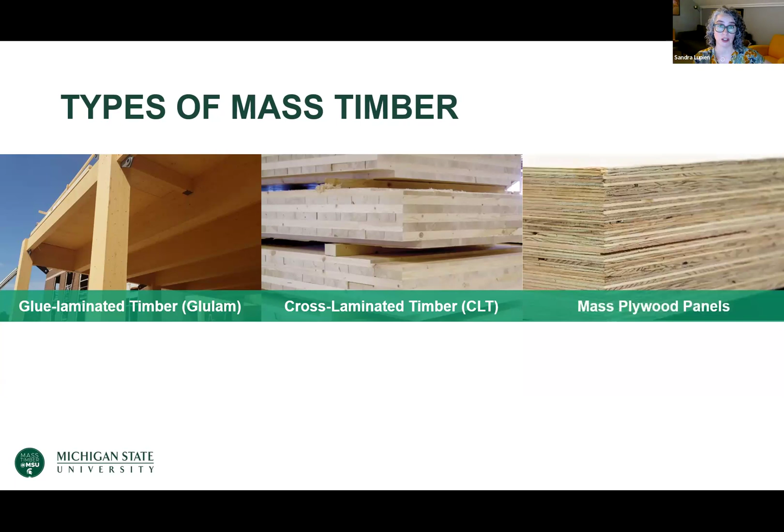Cross-laminated timber, these are gigantic panels, and similar to glulam, it's layers of dimensional lumber with adhesive, etc. But here, each layer is in the opposite direction of the one next to it, so you have a panel that's strong in more than one direction. This type of panel can really help provide the lateral resistance in a building, the property that makes the building not fall down in the wind. And this is the thing that we haven't been able to do with wood in big buildings before. These panels are typically used in collaboration with glue laminated timber, other types of mass timber, and other types of construction materials as well.

And then here's just a few more types of mass timber. I'm not going to go through these in depth, but just know that mass timber is an umbrella term for a bunch of different products, and glulam and cross-laminated timber are the most popular of them, and they're the types of mass timber that were used in the building that we're going to talk about today.

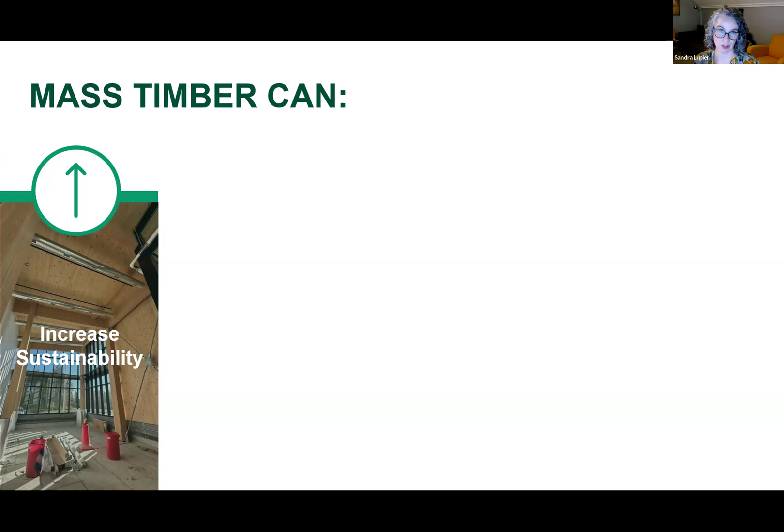Why do we care about mass timber? Why are we excited about it? Well, it can enable us to build buildings more sustainably, right? Wood is a renewable resource. When we use it, we plant more trees, and those trees absorb carbon dioxide from the atmosphere. They convert it to carbon, they store it, and then wood continues to store carbon when it's made into building materials and buildings. So this is a way that we can reduce the carbon footprints of our buildings through the materials that we choose. Thinking about MiGBC, this works really well in collaboration with strategies to reduce operational carbon in buildings, so we can get even farther.

We can improve the efficiency of construction, right? And just in a nutshell, mass timber is usually like a prefabricated kit of parts.

So when it comes to your building site, and the guys who built the building are going to talk about this, you can achieve efficiencies when you're building the building. Plus, you also don't typically need to put as many fire protective coatings or fire protection materials on top of your mass timber. And it's so pretty, you don't want to cover it with aesthetic finishes either.

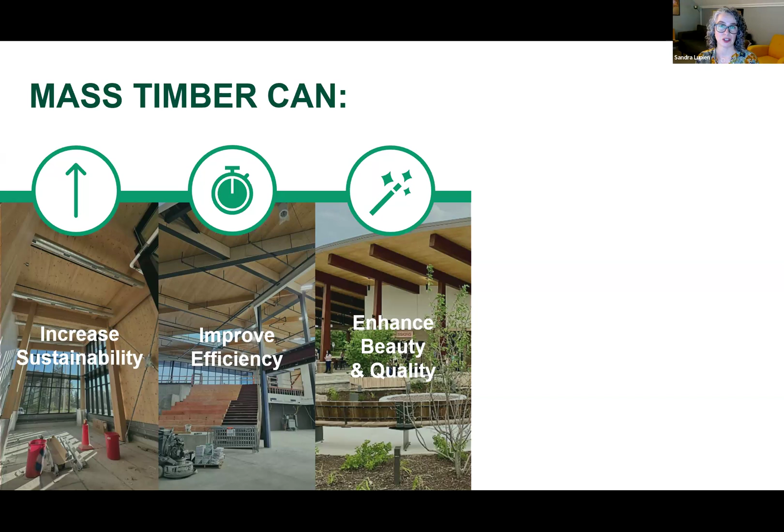We can certainly enhance the beauty and quality of buildings. There's a term called biophilia. This is the term that refers to the benefits that humans experience when they occupy buildings that include exposed natural materials, especially wood. And we see improved sense of well-being, improved mental health, and even improved productivity. So good reasons to build with wood.

We can create new types of jobs, both in manufacturing, forestry, construction. And of course, by creating a value-added, large-scale forest product, we can create new ways and new incentives to support healthy, resilient forests, both by creating revenue to reinvest in forests, and helping create reasons that forests should stay forests and not be converted to other less beneficial uses.

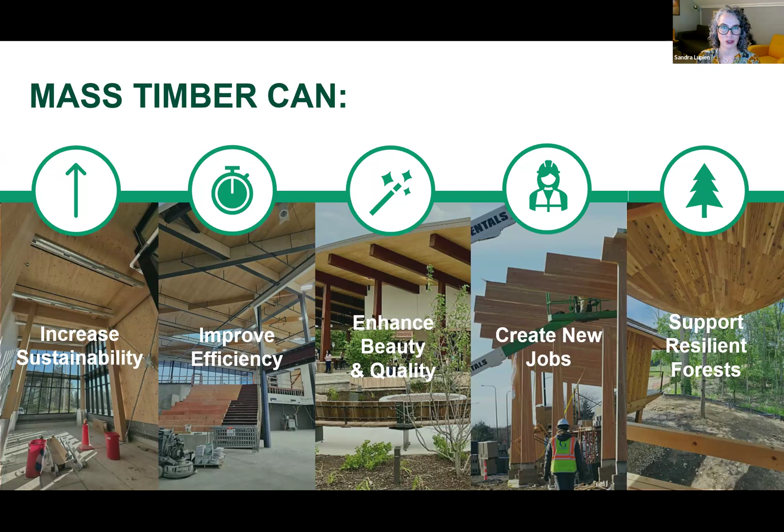Mass Timber at MSU is working to foster a mass timber ecosystem for all of these reasons. We talked a couple of webinars ago about our STEM teaching and learning facility on the MSU campus. We leverage this mass timber building as a learning laboratory for anybody who wants to learn about mass timber. So if you want to tour our building, bring a group through, learn about mass timber, you should let me know.

We operate the Michigan Mass Timber Community of Practice, which is a quarterly virtual peer learning community for Michiganders who are engaged in or interested in mass timber. We host events, we take people to events, always looking for opportunities to bring information to people and bring people to information. And then we have a robust research portfolio and are developing curriculum at a variety of different levels to advance mass timber.

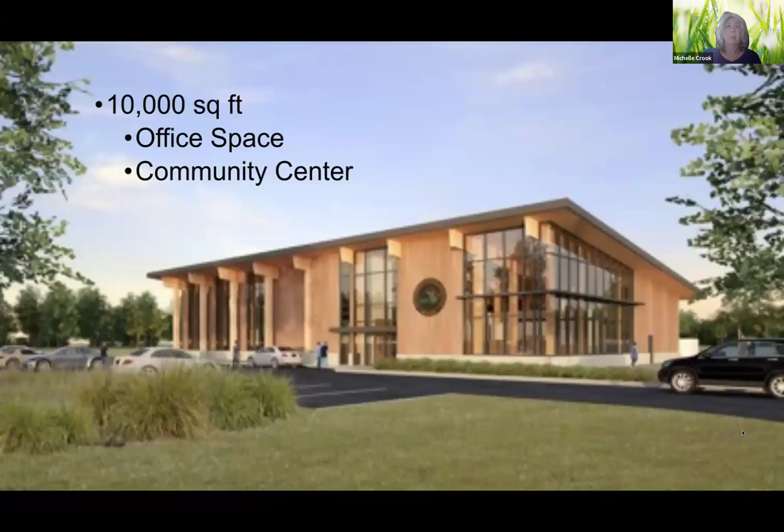So we began working on this concept when Governor Whitmer released the MI Healthy Climate Plan, which was a state strategy to achieve net zero carbon by 2050. It called for using low carbon building materials like mass timber for residential and commercial buildings. So based on this, and with our goal to support the timber industry, we pushed to make Newberry entirely from mass timber. We see mass timber production as a key economic development opportunity that benefits Michiganders in cities and suburbs and rural communities across the state.

And so we ended up with just over 10,000 square foot office space, along with a community center in the space and the lobby area, which, well, we had bigger plans initially. We did end up going to this size, but it's suited our needs well.

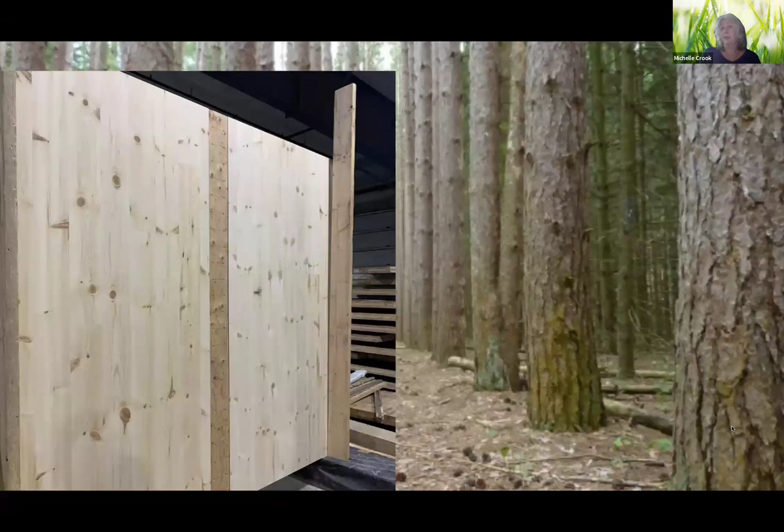Next slide, please. Being part of state government and given all of our requirements for contracting and projects, innovating and new technologies are not always easy to implement. We did not have a mass timber supplier in Michigan, which was one of the hurdles. We also started building right during COVID, when prices began to skyrocket and labor was difficult to find, and we were in the Upper Peninsula, which was another hurdle.

And then we decided to take on the added effort of utilizing Michigan lumber for some of the mass timber components. We felt this was really important. We wanted to be one of the first buildings to use Michigan sourced material and to be able to demonstrate what was possible with Michigan wood, hopefully opening the doors for mass timber manufacture in Michigan.

So we selected red pine to do this. Why did we select red pine? There's a variety of reasons, but based on some discussions with MSU, we knew we needed to focus on softwoods for the project, and red pine emerged as the best candidate. It's our fourth most common tree species in Michigan. We have a lot of planted stands of red pine as well as native stands. It recovers naturally after forest fires and is one of our fastest growing trees. And Anna will get into more about why it was a good choice based on the technical aspects of that.

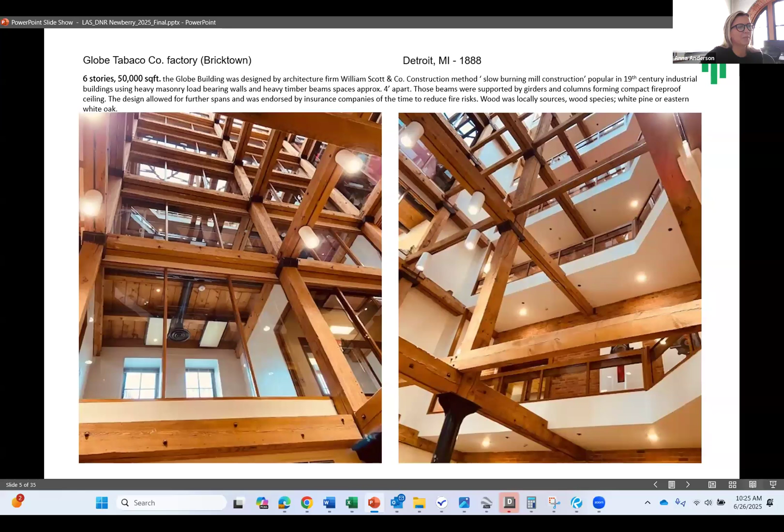Going back to it, we are a very sustainable firm. I just want to mention this: we have over 110 LEED certified buildings, and I think 7 Living Building Challenge buildings right now in planning and design. This is actually the location of our current office. We're located in a Globe building downtown Detroit. This 6-story building used to be a tobacco factory built in 1888.

And I did a little bit of research in regards to where the wood came from and what the species were. There was the typical slow-burning mill construction when they built industrial buildings in the 19th century. What I found is that possibly at the time they were using white pine or eastern white oak for that type of construction.

So the project is located in Newberry, Michelle was mentioning here, but we're in Detroit, so we travel there every month, 365 miles north, 5.5 hours driving time. I was really happy to go there.

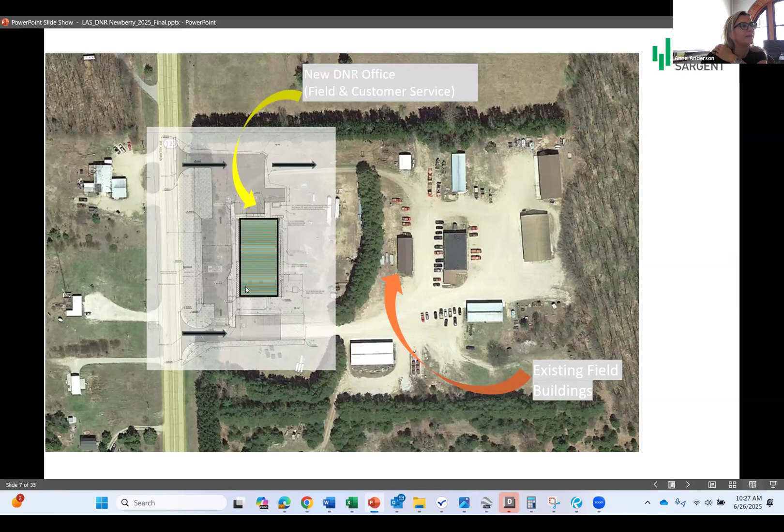The DNR had the need to locate a building really visible from the M-123, a state highway—that building is on the way to Tahquamenon Falls. So it's very visible from the road when you're driving by. Even Jason was mentioning a few times that sometimes people were driving by and then turning back because they wanted to look at what the building was. The purpose was placing it at the site with that particular exposure that would engage people to stop by and engage their curiosity.

Some of the things Michelle already mentioned, I'm not going to be redundant here. Maybe I'll more talk about the whole space.

When you look at this image, there are mostly office buildings, divided into multi-purpose room, lobby, and display area where the DNR will showcase the natural regional resources.

And I think we're also going to showcase the story of the building, the mass timber, where it came from, as well as all the work Michigan Tech is doing in regards to investigating hardwood for CLT production.

As you can see in this isometric view of the building construction, we used 5-ply CLT for roof decking, which you can see here in a cut, and 3-ply exterior walls of red pine for the building perimeter.

The whole structure is a post and beam structure with glulam Douglas fir. Initially, when our structural engineer worked on the project, I think the roof was a 3-ply roof decking, but because of the design values and performance values of red pine, we needed a little bit more material, so this became 5-ply.

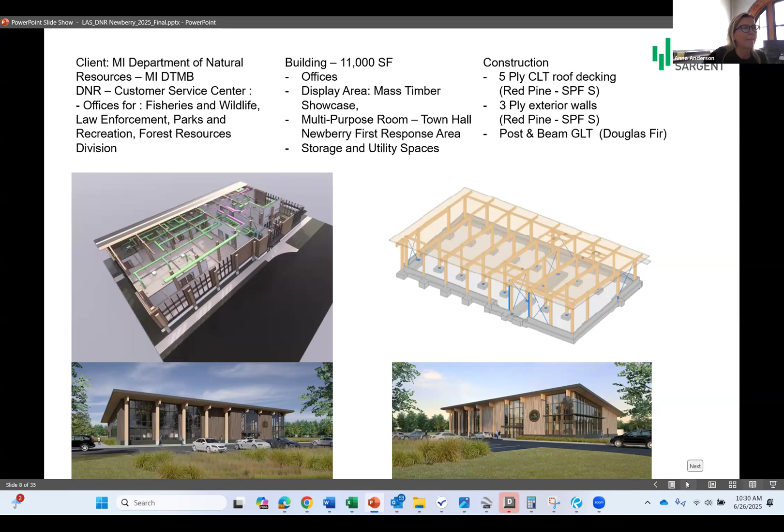This is a bit of the process, and Michelle was mentioning this before - I'm not going to talk long about this, but the project is supposed to be bigger. There's supposed to be a big storage building behind, for the DNR to use for equipment.

The building altogether is supposed to be 30,000 square feet. It just didn't economically pay out at the time - we were going through the pandemic and some other issues as well.

So I just wanted to show here that we did some massing studies, and we played with different structures and different roof shapes.

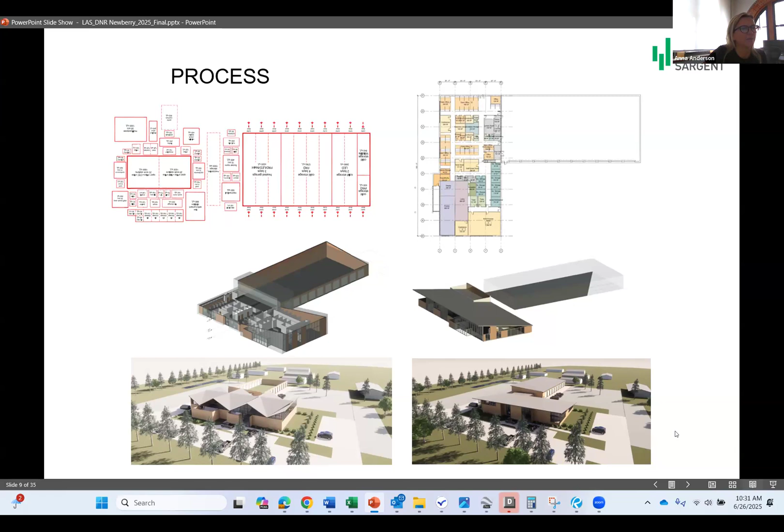This was part of the customer service center connected with the locker rooms and the storage building, approximately 15,000 square feet. The other one was also 15,000, ended up being around 10,600 square feet.

These are also the earlier studies of the little shrunken building showing field offices, customer service offices, wildlife and fishery center, multi-purpose room, and the lobby and display area.

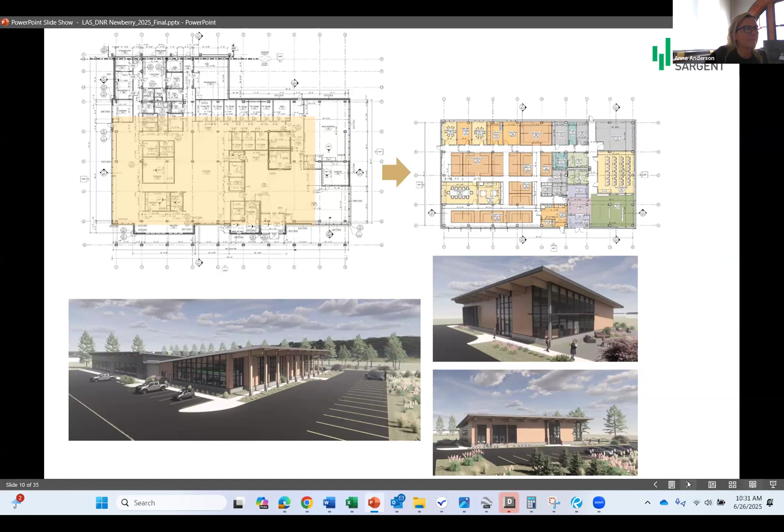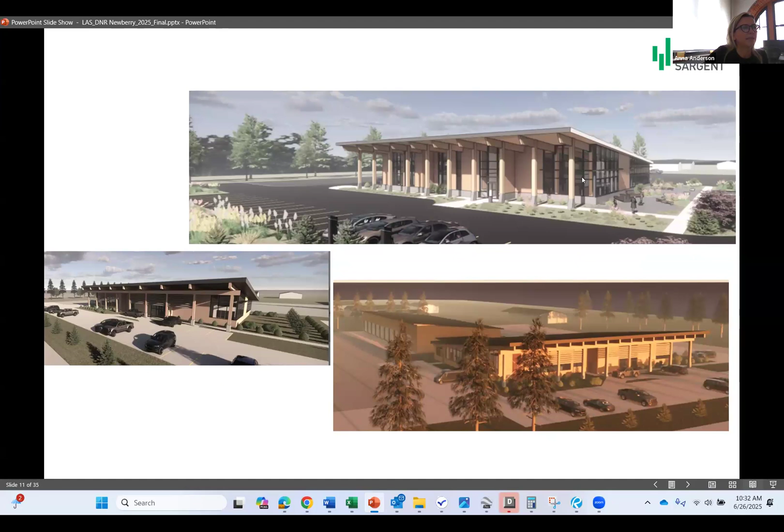A little bit more of the early renderings, just playing with the structure. The main intent was actually this southwest corner here, and we'll see this in further images too - the invitation to enter the building and to see the structure throughout the glazing.

Michelle mentioned this also - this is a project showcasing one of Michigan's top industry forestry and timber products, and this is the story of how we got there. We had to find the trees in Michigan, find a sawmill, and find a manufacturer.

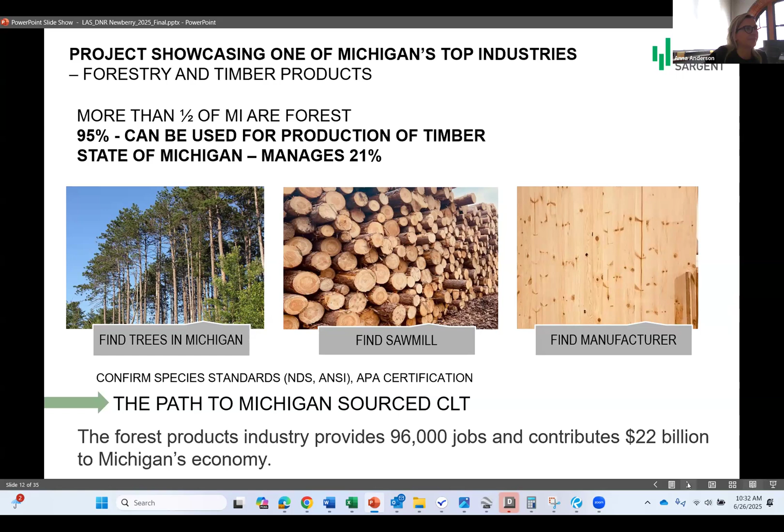Michigan State University's Forestry Department, School of Planning, Design, and Construction has done extensive study on Michigan's tree species and the viability of using the species in construction. That was the reason, based on the study, they worked with our design team to select red pine for the project.

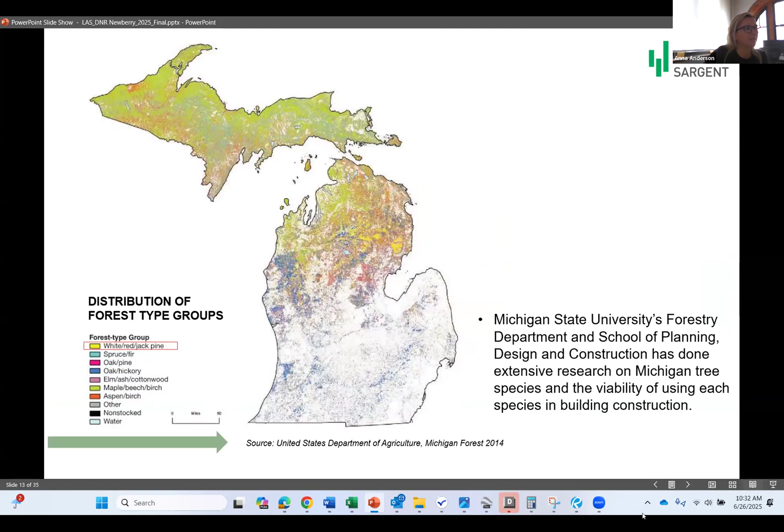As you can see here, half of the state is forested, and Michigan has diverse forest types. I think, Michelle, you mentioned a little bit different numbers here, but I think they were close.

But red pine is 5% of the mixed species types. Red pine grows in the eastern Upper Peninsula, western Upper Peninsula, and northern Lower Peninsula.

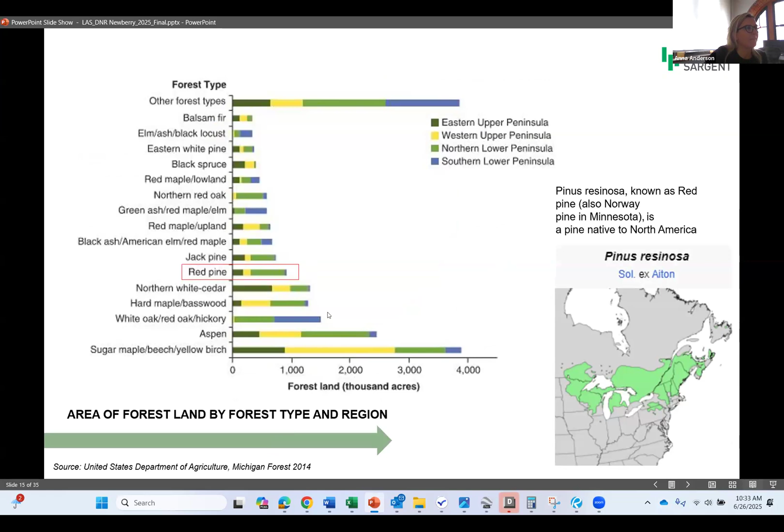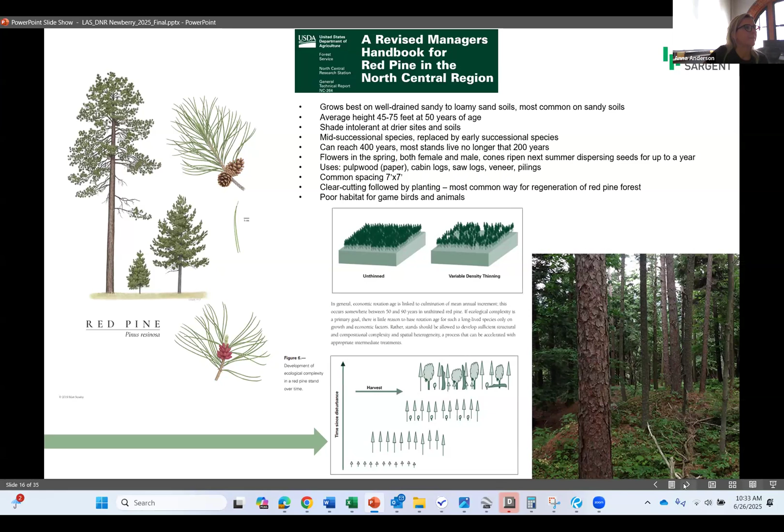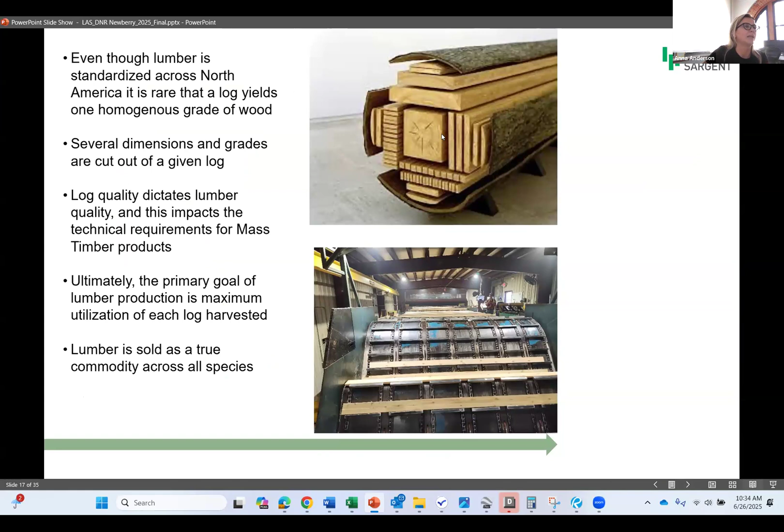This is just an image showing, as a reminder - maybe Russ will touch on this later too - how the log quality actually impacts the efficiency of mass timber.

So, National Design Specification from American Wood Council. This is the process of certification, and I think Russ Vaagen will touch on this as well a little bit more.

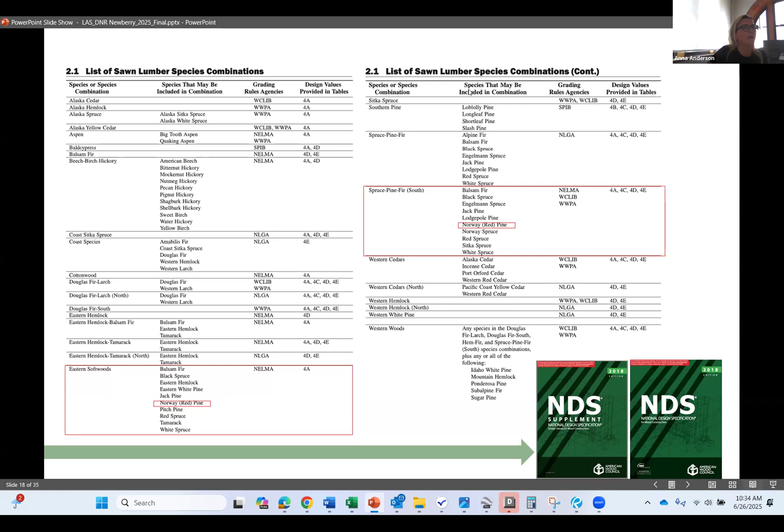Red pine belongs to lumber species in eastern softwoods, and is located in the spruce pine fir combination of sawn lumber species. Then we have to look at the design reference values for visually graded dimensional lumber for spruce pine fir south.

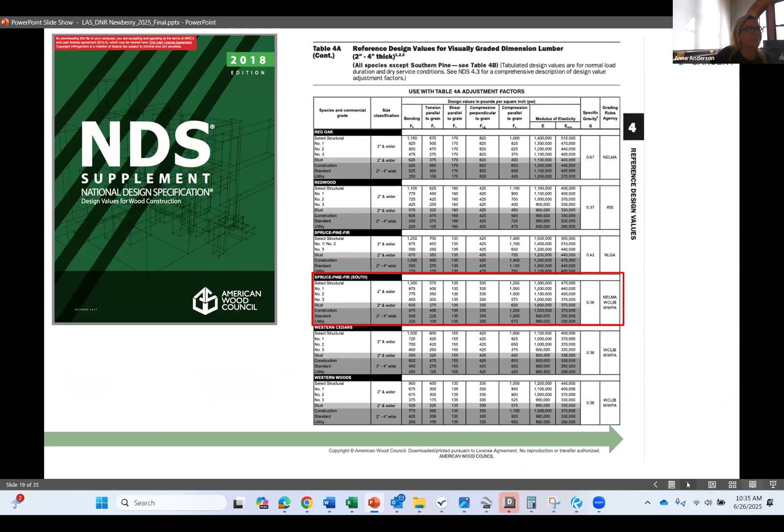And then for mass timber, we look into mass timber manufacturing standards, and so it relates to APA PRG 320, the standard for performance-rated cross-laminated timbers.

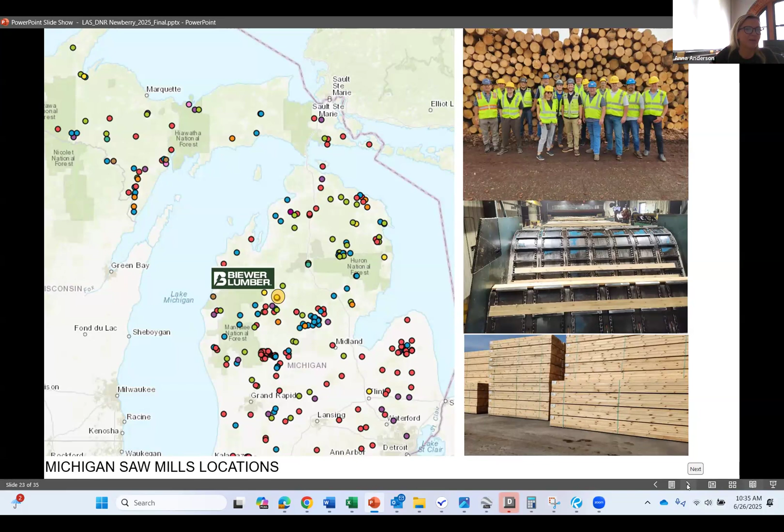So this is the path of achieving the locally sourced timber. Part of the team visited Biewer Lumber. I think it was 260,000 board feet that were transported from Biewer Lumber to Colville, Washington, where the supplier was selected, manufacturer Vaagen Timbers.

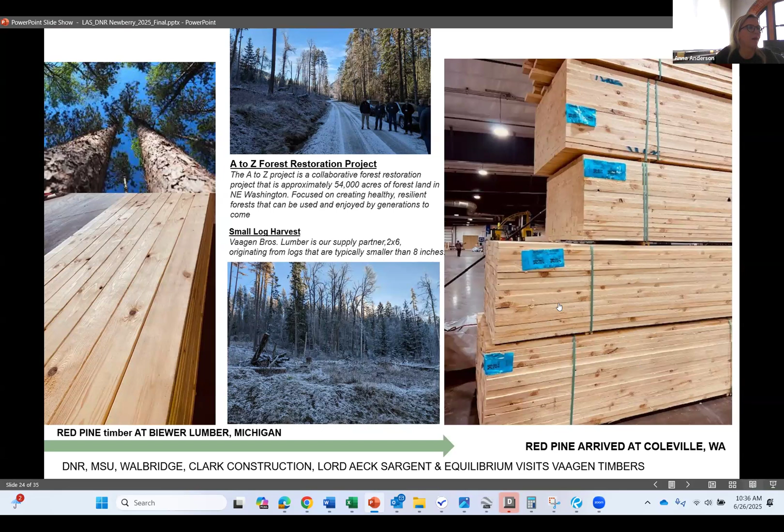We visited Russ's forest and had a beautiful tour there, and also visited the factory. We were part of the design team with Michigan State University, and the contractor was part of experiencing the whole certification process at the facility.

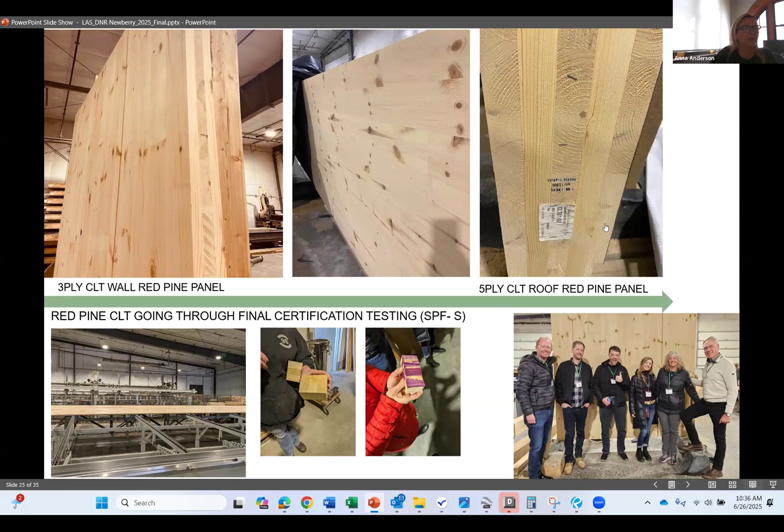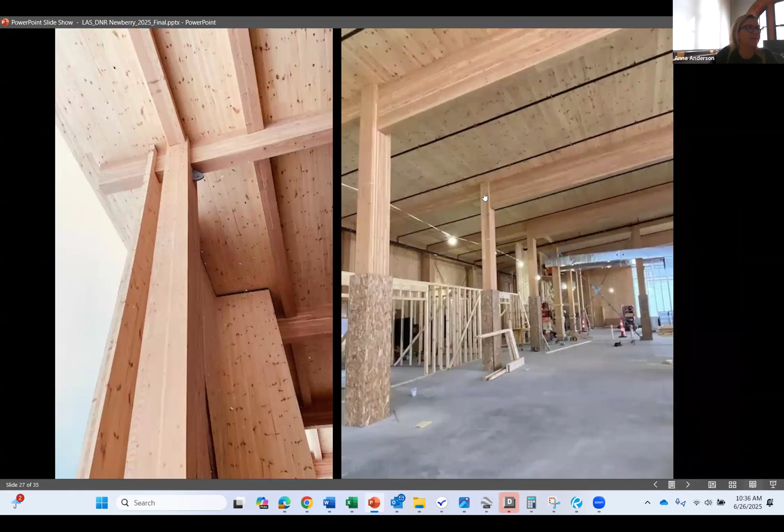Some images from the construction. You can notice the significant difference in the red pine, showing the knots in the wood, which contrasts with the dark fir of the beams and columns.

I think this image is from January this year. An interior image showcasing the display area.

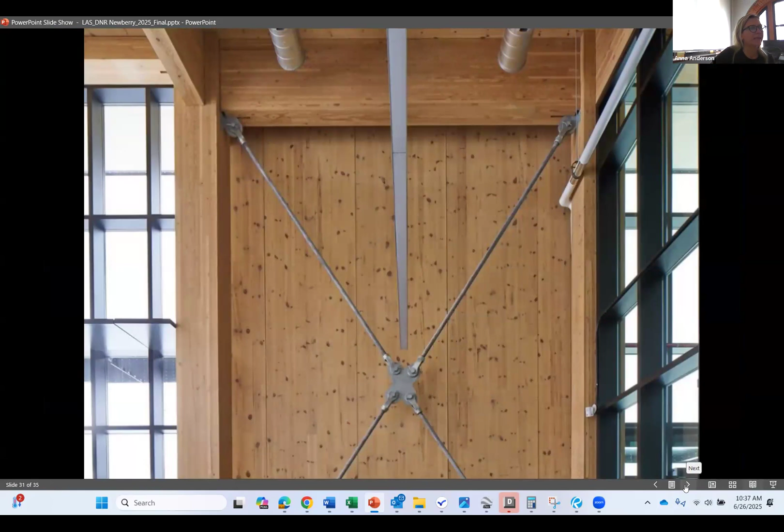This is the multi-purpose room. You can see the connection, indoor and outdoor, with the beautiful trees beyond. And this is again the detail in the lobby and display area.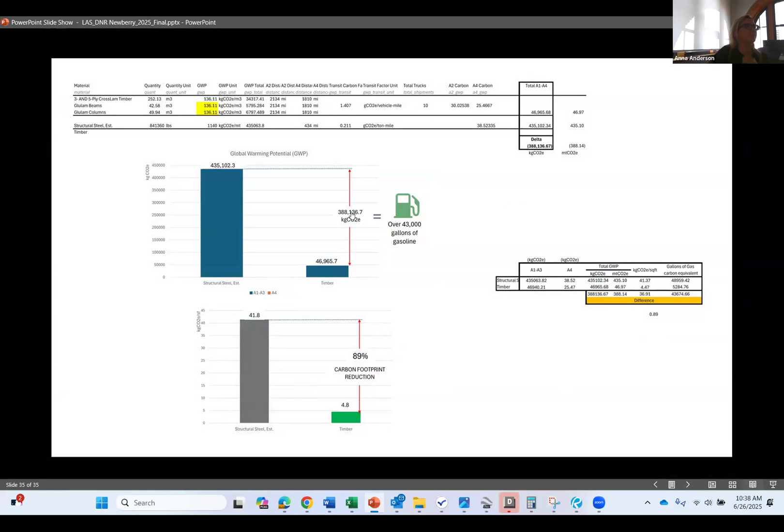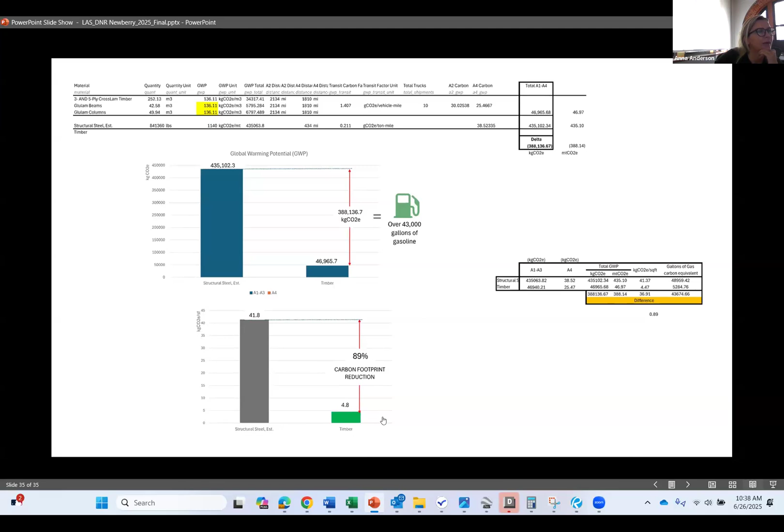And our team did a study regarding carbon footprint. This study showed an 89% reduction of the carbon footprint comparing the use of structural steel versus timber as used in our project. I think that's all I had.

Wonderful, thank you, Anna. It is indeed a beautiful building, and something to be very proud of from a design perspective. Russ, as you're getting your slides up, I'll share a couple of things. I just think this building is so striking, because as Michelle mentioned earlier, Newberry is a pretty small community, but this beautiful building just grows right out of the landscape and makes an impression, like tall trees that are part of a forest. I think that's the impression it gives. I'm sure that was intentional.

As you're coming across it, is it M43? Is that what it is? Yeah, 120—I'm sorry? I think it's 123, right? M43 is not that. I'm wrong, yes, that's down here. But yes, it's so incredible in the landscape there. Hopefully when people are going through or in Newberry, they can swing by and take a look at it. It is gorgeous.

So now we're going to hear from Russ Vaagen with Vaagen Timbers, which is the supplier of the cross-laminated timber panels and the glulam on this project. Russ is going to talk us through how a certification process like this looks on the part of the manufacturer and the collaborators. Thanks for being here.

Thanks for having me, it's always great to be part of a project like this. So Vaagen Timbers, as Anna and Sandra talked about, we are in Northeast Washington State. A lot of people confuse us with Seattle, but it's probably like the UP and Detroit—a large state and very different.

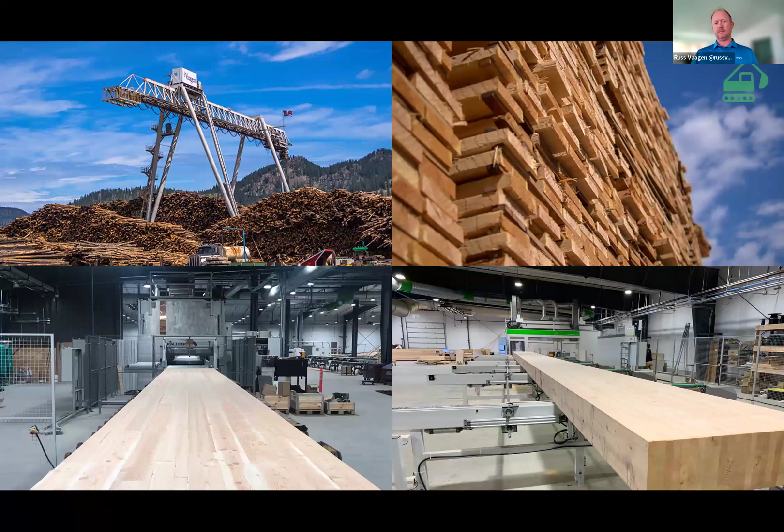I'll just share some slides here about who we are and how we got here.

This one I like because it shows the life cycle after the wood leaves the forest. You've got the portal crane lifting a truckload of logs at the Vaagen Brothers Mill in Colville, right next to our CLT plant. My family has been in the forest products industry for four generations.

We've been doing this for a long time, trying to perfect how to get the most from our forests. As you can see, the logs are very small.

Anna referenced the efficiency, and the technology has really moved from large logs and old growth to small logs and thinning.

We take a log, typically the size of a steering wheel in a car, and cut boards out of that in a stack very effectively and efficiently. That's how most of the forest industry operates throughout North America now.

The small logs then go into rough lumber, and at the bottom you see our CLT panel on the left and the glulam beam on the right. We have a very unique press in Colville that allows us to do both through the same press.

It does have its limitations in terms of size, so we overcame that challenge in this project by connecting two 4-foot panels and delivering them as an 8-foot panel into the Newberry building. It turned out great, and it was awesome.

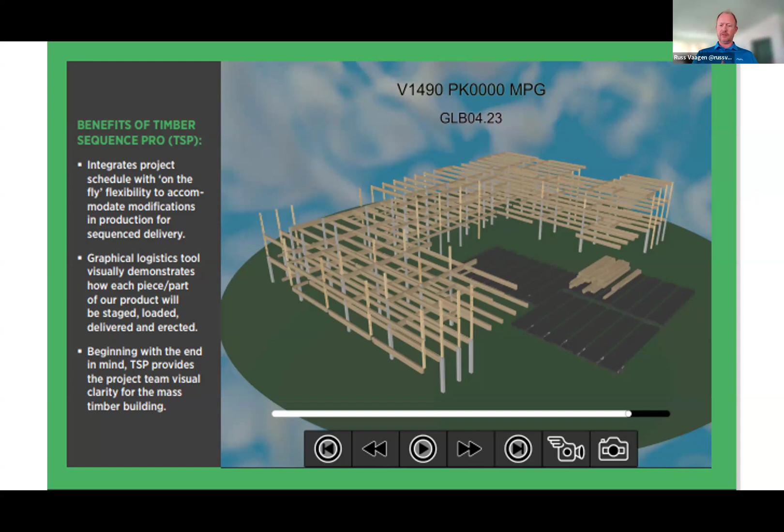We even add some additional features to the product, like custom hardware installation in the factory. So it's not as simple as Legos, but these are like large wooden Legos. They go together in a sequence. You follow the instructions provided, you collaborate with us, you know what's happening, and the building goes together very smoothly.

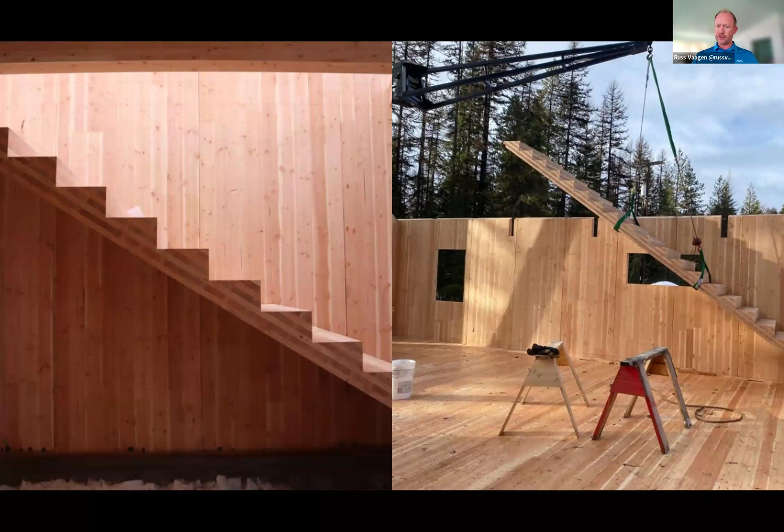I want to show a few images of projects we've done, so you can see there's a broader scope here than just one particular building type.

This is a home we did about 30 minutes from our factory. It's a lake place, near the Little Pend Oreille Lakes, just outside of Colville. Besides being a little more mountainous, it's very much like Michigan lake country, with lots of little lakes and some larger ones. This one sits on the bank of one of our lakes, and you can see we took a 7-ply CLT panel and cut a set of stairs, which became the design focal point for this house.

A lot of people think of timber as being kind of old, tired and dark. But as you can see here, the homeowners—this is the same project, the stairway comes up just to your right there—we used a whitewash finish on the glulam and CLT in this house.

This house was really cool because we delivered it in January. We started on a Monday, and the homeowner was sitting on her deck by Saturday. It snowed twice during the week at this location. From Christmas into May, there's usually about 3 to 4 feet of snow sitting at this elevation in the winter, so it wasn't an easy construction time.

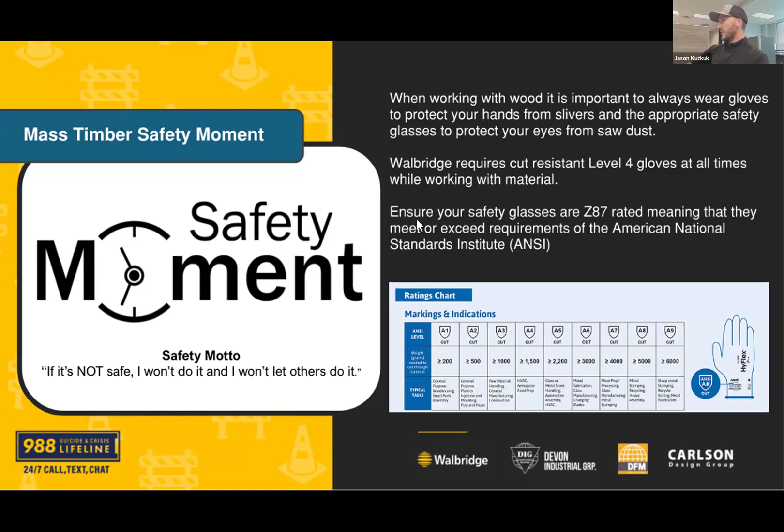And for those that don't know, safety gloves do have a little shield icon on them with a rating for their cut resistance level. So A1 being the lowest and A9 being the highest. So it's important to make sure that the gloves you're wearing are rated for the work that you're doing and the materials that you're handling.

So I've got some highlights here that some of the others have already touched on as far as our milestones during the pre-construction phase of this project. The first one being that the DNR engaged Walbridge early on while the project was still in the design phase, which was critical for us to provide feedback on constructability and details and sequencing of the actual construction of the

building. Our next milestone was identifying a sawmill that we could work with to provide the Michigan feedstock to our mass timber manufacturer. And we visited several sawmills throughout the state, and we ended up working with Buer Lumber in McBain, Michigan. They're a great sawmill to work with.

The next key step was engaging our mass timber fabricator, which we were partnered with Vaagen. They were a great partner for us throughout the process, very willing to step in and go through that certification process that Russ was talking about, which was the next key step there. That took some time. They actually did that certification process in conjunction with doing shop drawings for the project. And the timing actually worked out perfectly there, luckily for us. And our last key step was engaging our mass timber erector, that being Clark Contracting Services.

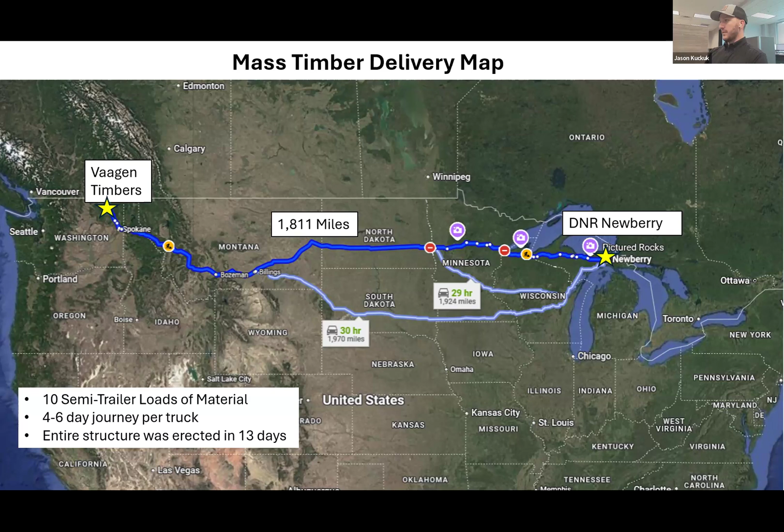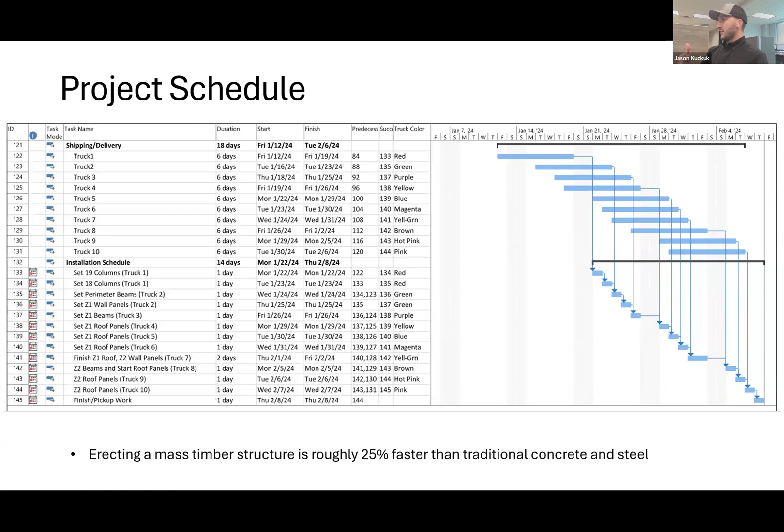So it was about a 4 to 6 day journey for each truck. So looking at our schedule here, it was a 13-day total erection timeline, 10 trucks. So if we look here, you can see when our first truck arrived to the job site, there was already 3 or 4 trucks on the road behind that truck. So it was very critical for us to hit those production timelines and get that material picked and into the air.

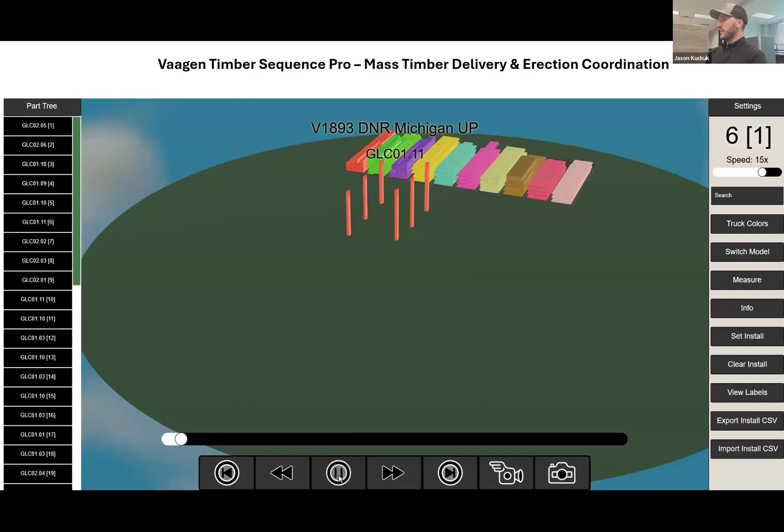Here's a little video here of a tool that Vaagen provided us to coordinate the mass timber delivery and installation sequencing. So play this really quick for you guys. So you can see it's color coded by truck here. The first truck is red, had the majority of the columns on it, followed by the beams and wall panels. We had the crane positioned on the back side of the building there, so we actually worked and set the remaining beams and roof panels on the back side of the building.

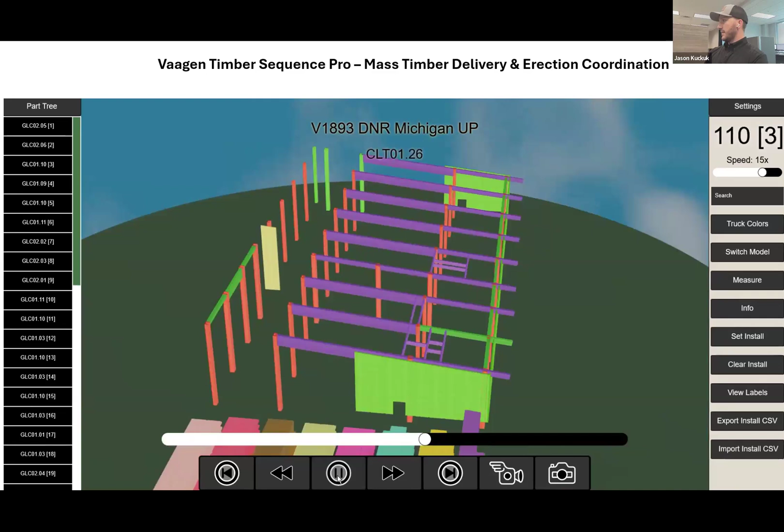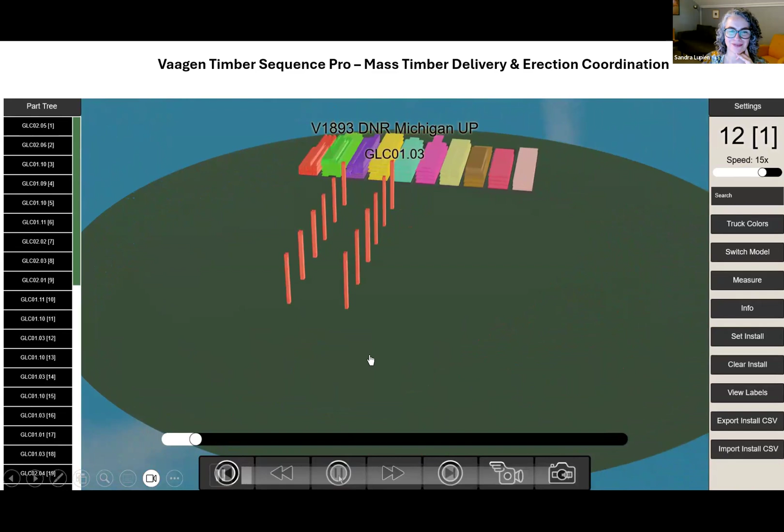And then we transitioned to the front side of the building, moved the crane to the front, set the rest of the wall panels, remaining beams, and CLT panels. And it wasn't quite as fast as this, but it felt like it. Almost. But this was a great tool. It really helped not only the construction team visualize and coordinate the installation, but the DNR, the owner's representatives, the design team could all give their feedback and input on our sequencing.

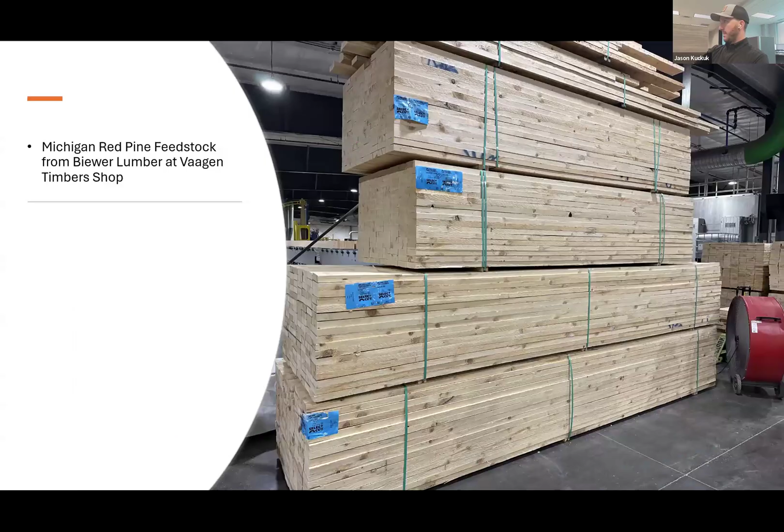And Nate, you want to talk about some of the details that we had specifically on the project? Sure. Getting into our installation a little bit, the columns and base plates we had to be extremely precise. The anchor bolts and base plate layout had to be laser verified, as the glulams were fabricated with extremely tight tolerances. And with the columns being 26 foot tall, any variation or deviances from plumb were magnified. We used dowel pins at the bottom base plate to secure the connection and patched those with wood plugs to create a clean connection with minimal hardware visibility.

Yeah, you can actually see the bottom of the column is routed out, so that covers that steel base plate there. And then the concrete floor slab gets poured around that. So really, you don't see any of the steel structure under there. And that was one of Anna's details, she wanted the columns to look like they were floating. So.

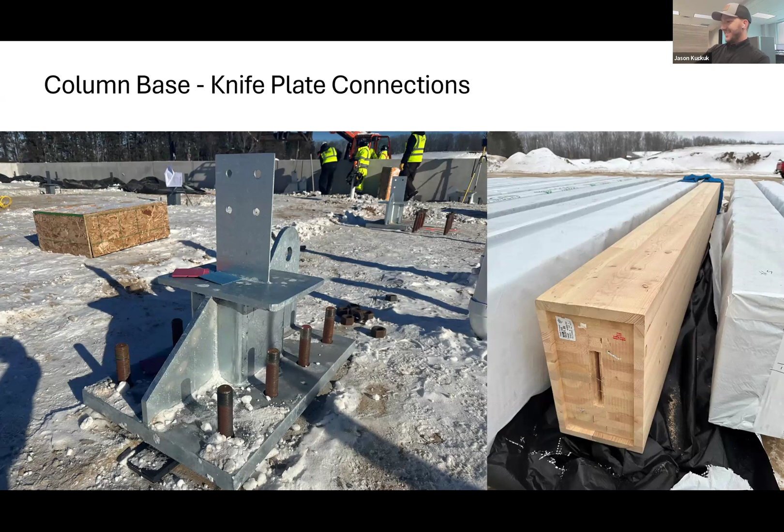Yeah, and actually at the top of the columns, the column to beam connections, concealed hardware was also utilized to again create that clean aesthetic per Anna's design. Some beam members also sat in factory cut pockets within the top of the columns, giving us a flush beam to column connection, which again required those tight tolerances and careful alignment.

Yeah, and I think it's important to note too that this hardware was installed by Vaagen in their shop, so when it arrived to the site, it already had that hardware connected on it, and that reduces the time in the field to attach that hardware.

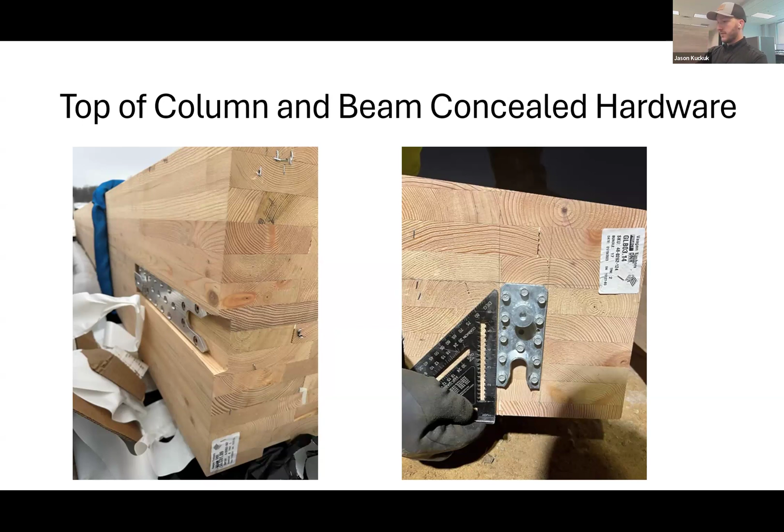And taking a look at one of our columns being set here, you can see our rigging and crew composite. We choked the column using a nylon strap with one of our carpenters up in the basket, guiding the column into place, with 2 carpenters below, aligning the column to the knife plate and securing the dowel pins. Our crane operator and riggers were in constant communication with sequencing to maintain the pace and ensure all of our crew members were on the same page.

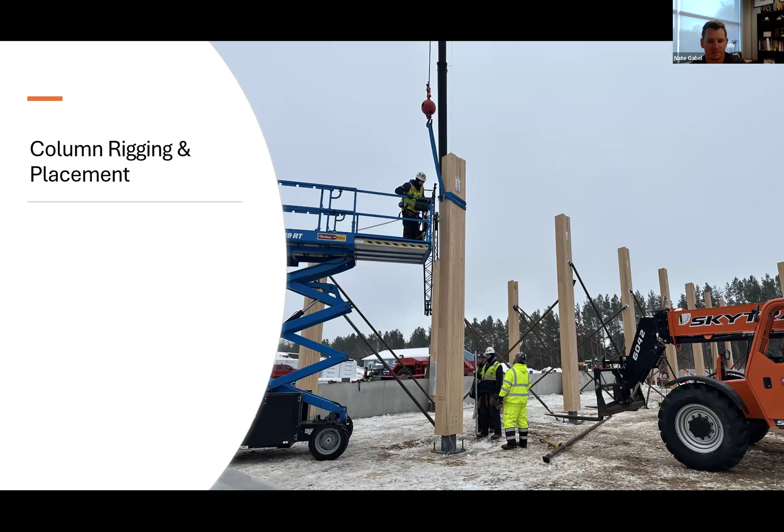This next slide shows our columns mostly set up to where the crane could safely reach from the backside of the building. One unique challenge we faced was actually the braces. As we mentioned before, these columns were 26 foot tall, and with no concrete pad in place, we had to reach the adjacent footings in the foundation. So we actually used tilt-up concrete wall panel braces to maintain plumbness. It wasn't a concern over the weight of the glulams, but it was more for the required reach to be able to make our columns plumb.

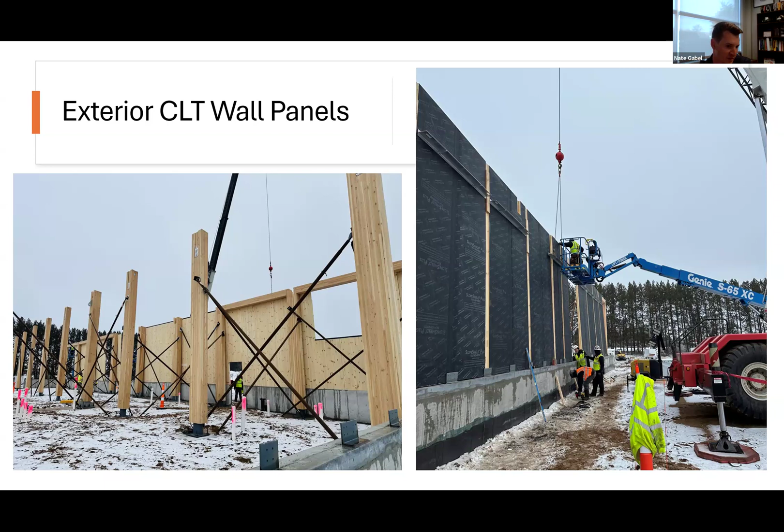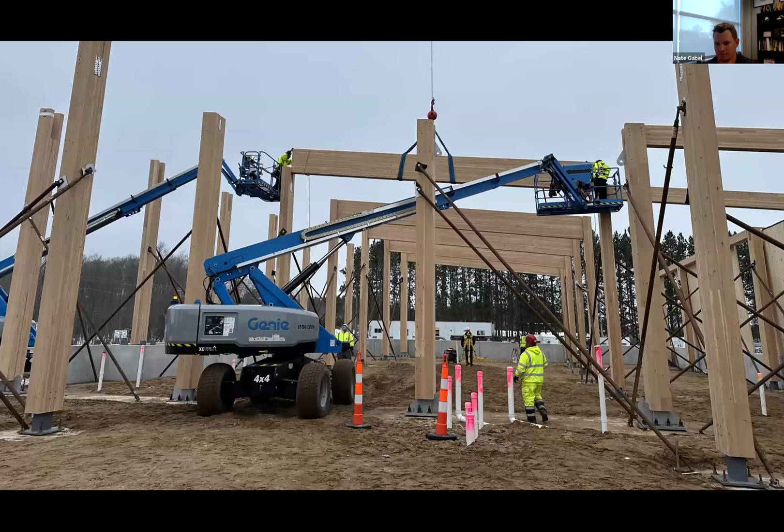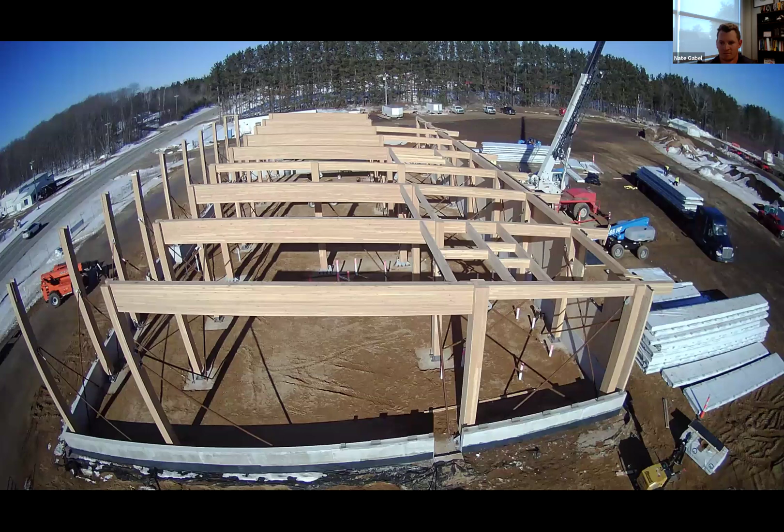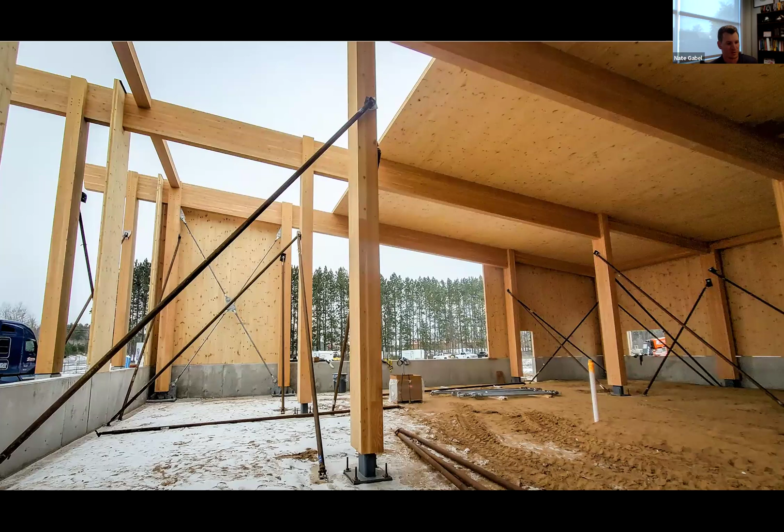These next few slides are drone and progress shots. Here you can see the truck staging and crane position on the back side of the building, reaching out into its safe distance, over on the right-hand side of the picture. Here, you now see the crane move to the front of the building where we're completing the CLT roof panels. A couple of progress photos from the inside of the building.

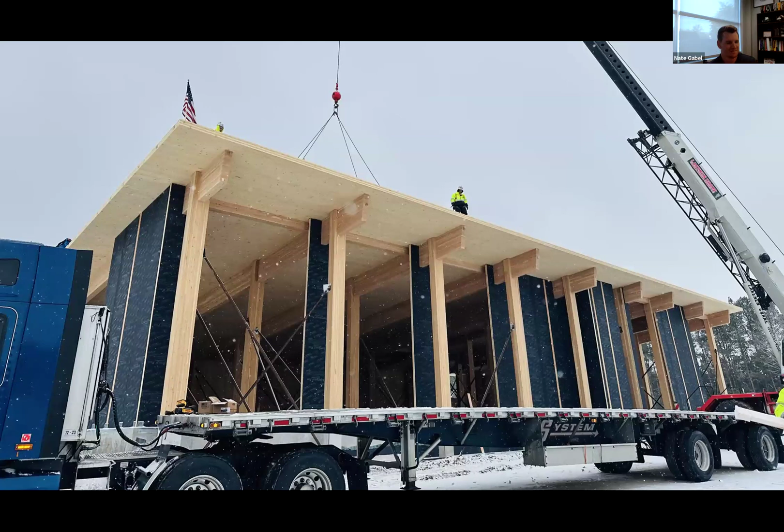Yeah, we did get lucky with the weather, the winter of '23. And here we are setting the final panel. At this point, we had the building fully dried in with temporary protection at all the openings and added fans and heaters early on to maintain the humidity and moisture. Again, QA checks were constant, especially during the early enclosure phases. So kind of like how Jason and I were talking about, we had the building up in 3 weeks and then fully enclosed in 4.

Yep. I would like to point out that we did a 3D BIM model of the mechanical system and coordinated that with Vaagen to pre-cut all of the penetrations. You can kind of see some of them here in the roof panels for pipes and ductwork that needed to go through the roof, which saves a lot of time in the field and is also a better quality product, being able to make those cuts in their shop rather than in the field.

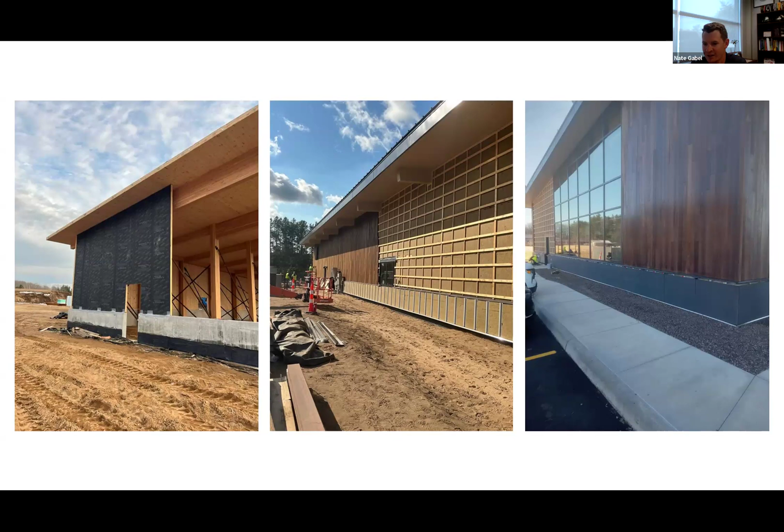In addition to the mass timber, we had the carpentry scope, including building the exterior envelope. Here we have some progress shots showing the blank CLT wall panels on the left, right off the truck. Then in the middle, you can see the rigid insulation and beginning phases of the thermally treated wood siding that Anna mentioned, and finally the glass fiber concrete panels on their support framing.

Moving on to the interior, you can see some of our 2x stud framing. Sticking with the local sourcing theme, we bought all of our framing materials from a lumber yard less than 2 miles up the road from the project site.

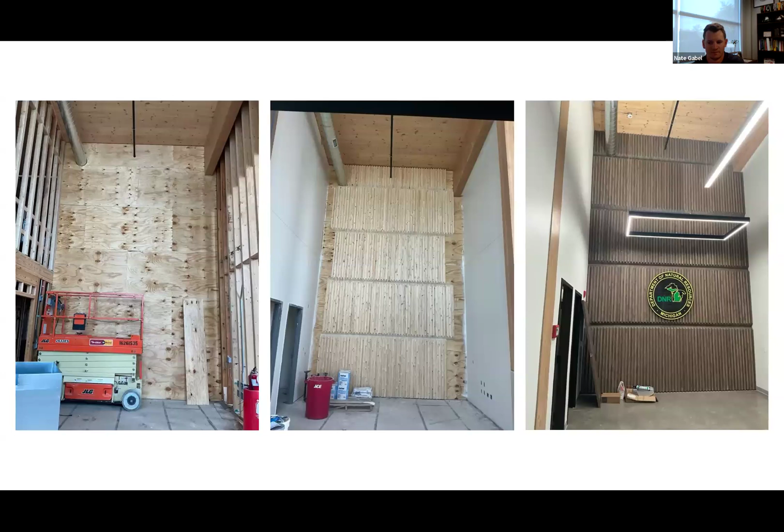Additionally, something you don't see in your projects every day related to the mass timber world was a custom site-built NLT accent wall. The nail laminated panels are not structural and are meant to be an architectural piece as you enter the DNR building right behind the reception desk.

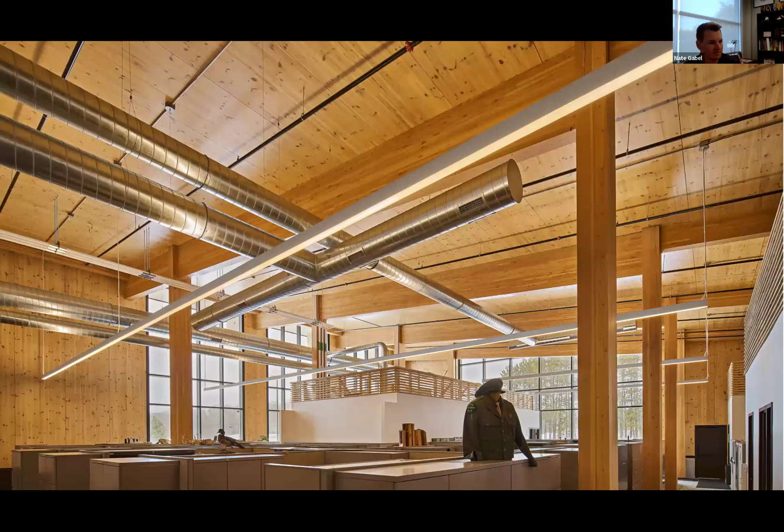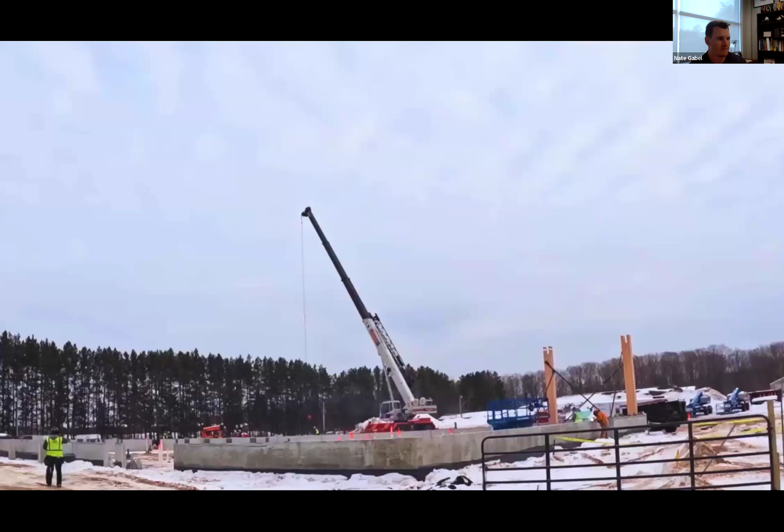And here we have a couple final shots as we wrap the project up. I actually brought a GoPro out to take some time-lapse footage of our install. Unfortunately, a couple of the videos of the CLT install got corrupted. So if anybody is a GoPro expert, feel free to reach out because all the videos are sitting in storage and we'd love to figure out how to recover them.

Yeah, I think that's all we got. Thank you.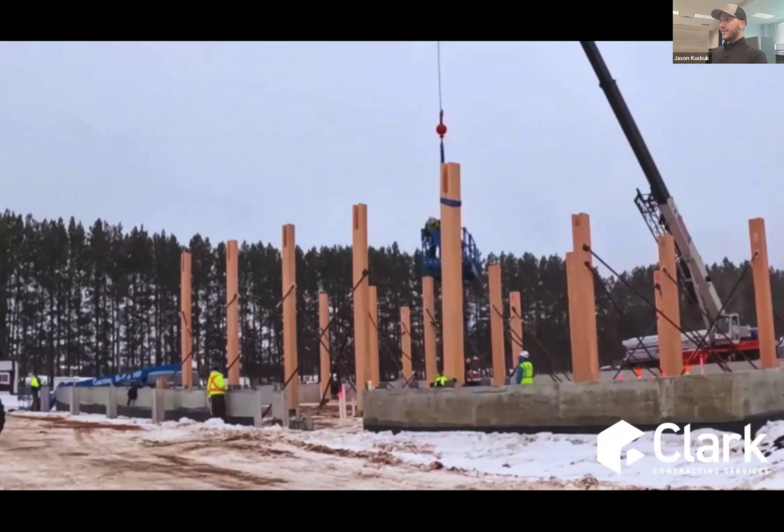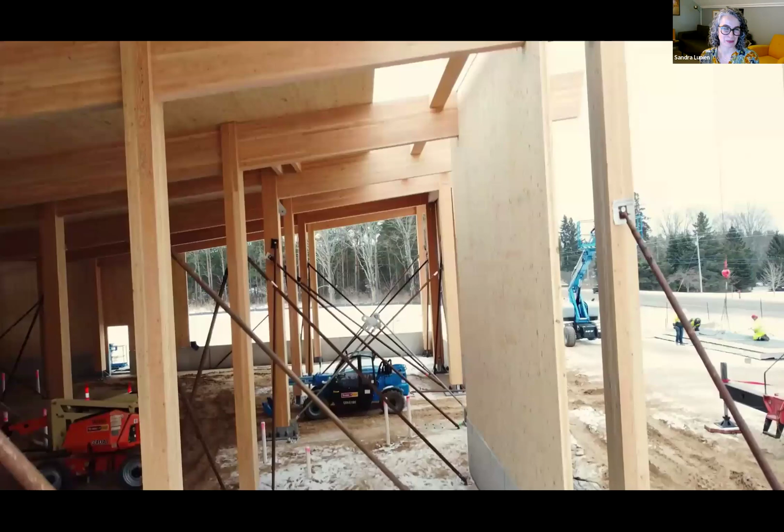Just one thing I want to say that I appreciate so much is how well your teams documented the project. It's so valuable for people to see how the building comes together. I love the way, Jason, you presented the model, the little cartoon model, and then Nate, you had photos and footage that showed those steps in real life and how the model then ended up applying in the field. Great job explaining how all these pieces came together.

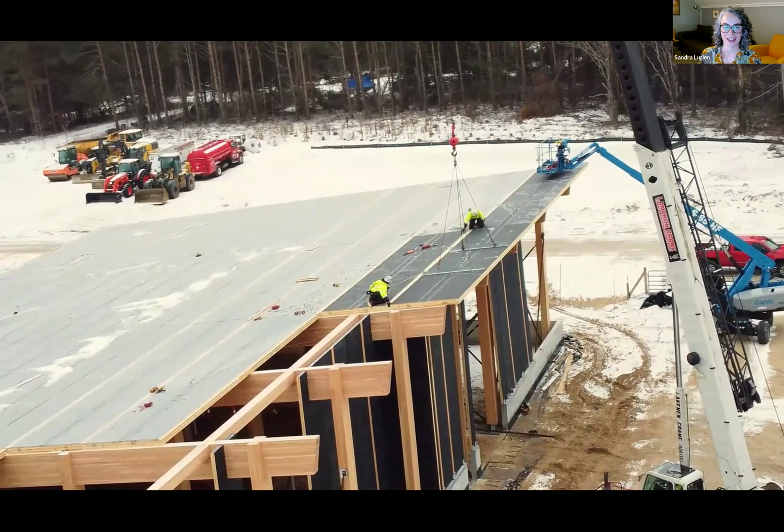Some people are putting very supportive comments to you in the chat. Do people here have questions for our wonderful panelists who've shared with us from vision all the way to completion, how this wonderful Department of Natural Resources customer services building in Newberry, Michigan came together?

Something that has been said in various ways on the call, and I'll say it in my own way: DNR taking the leadership to really insist upon Michigan wood, red pine in CLT panels in their building demonstrates DNR's leadership in this space, wanting to see mass timber production in Michigan using Michigan wood and putting Michiganders to work. I think by doing it this way, they've effectively de-risked this particular species for any prospective manufacturers in Michigan, possibly Vaughan, as Russ mentioned. So really an important act of leadership on the part of DNR.

It's hard to say, but I'm hoping that this building will last 100 years. And DNR must have standards about how long buildings must last. The other part I would say about mass timber is that it can be recycled and upcycled, and there's a whole host of buildings in Europe that have been designed to be constructed, deconstructed, moved, and rebuilt.